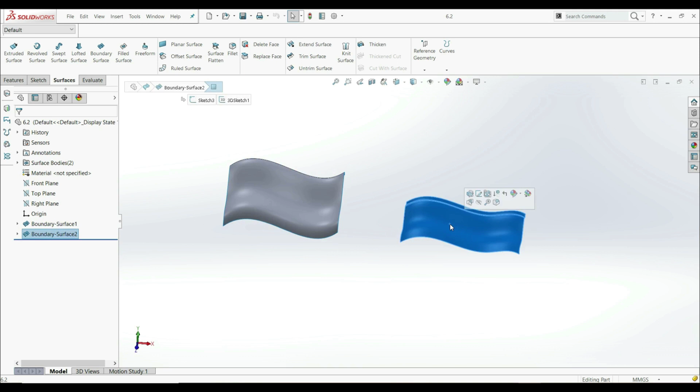In this lecture, we're going to show the second advantage of the boundary surface above lofted surface and swept surface. So we have two surfaces here, this one and this one. And we want to create a new surface that's going to connect this surface with this surface. So we're going to use boundary surface. So let's go to boundary surface. And now we're going to choose our profiles, this edge here and this edge here.

And now as we see, we connected those two surfaces. Here we have connectors, connector 1 and connector 2. We can manipulate connectors as we showed in the previous section for the lofted surface. But let's try to move this connector to this side. Now, if we click on this connector, let's try to move it. As we see, we can position this connector at any point on this edge where we want.

As well, this is the second connector. We can position it where we want. And this is not possible with lofted surface. So this is one advantage, that you can position the connector where you want so you can get better control over your surface. Because in the lofted surface, you could only put a connector from one vertex to the other vertex, but you couldn't position the connector where you want, like this. So this is one advantage.

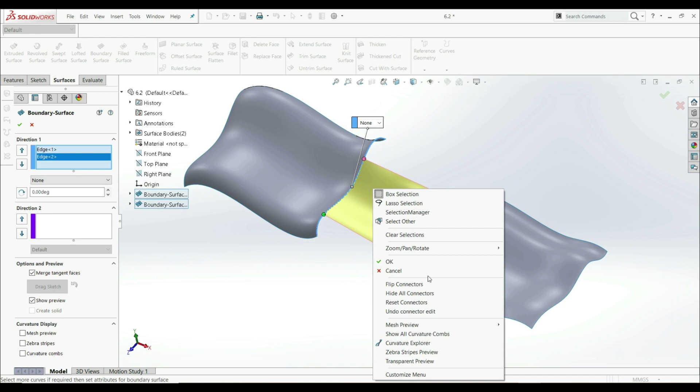But now we want to go back to the surface that we had at the beginning. So I can right click and reset connectors like this. Now let's click OK. So we got this surface here. Now as we see, the transition between this surface and this surface is kind of rough, and between this one and this one. And this is not something that we're looking for.

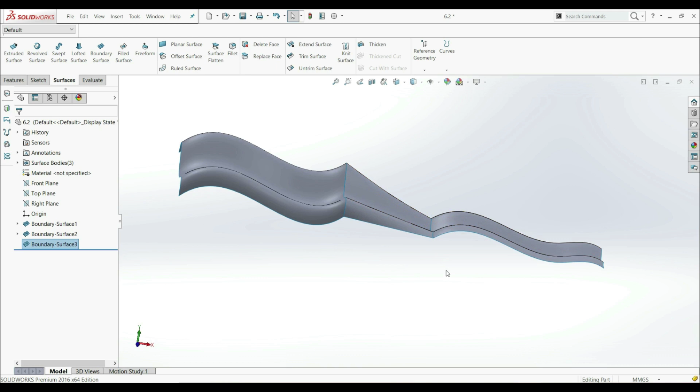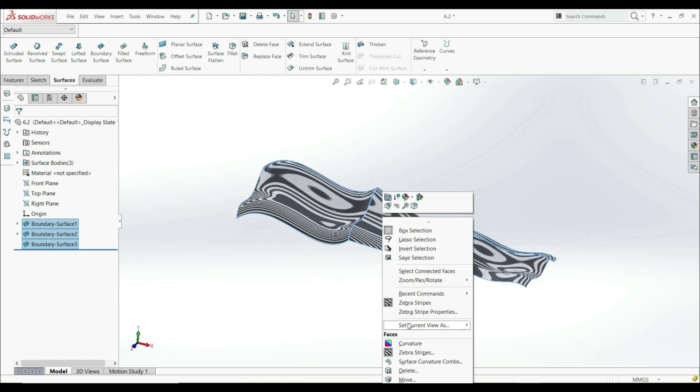If we select this surface, this one and this one, right click, let's go down, and here we have display, zebra stripes, to see how smooth our surface is. And now as we see, it's not really smooth. This is not something that we want. So we want to fix this. Let's first hide the zebra stripes, like this, and now let's go to boundary surface 3, right click, and edit feature.

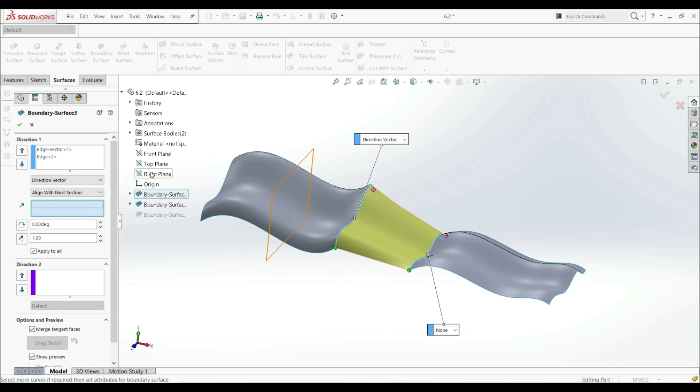Now here we have tangent type. If we click here, we have three options: direction vector, tangency to face, and curvature to face. So we can go with direction vector like this, and now we have to choose a direction vector. Let's choose, for example, front plane like this. And now as you see, we have direction vector here. We worked with this direction vector in the previous section. So here, we can change the draft angle, and we can change tangent length.

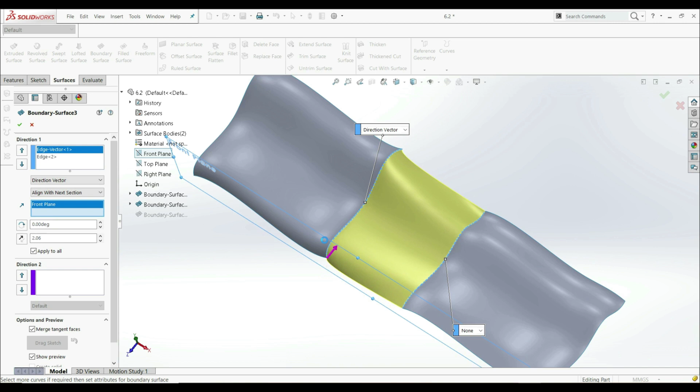As well, we can apply to both sides, or we can work with each side separately. So if we move this tangent length, we can see the difference in the shape. We can also change the draft angle if you want. So this is possible here, but this is only for this edge. If we click on edge 2, this is still none. Now let's go back to edge vector, this one, and let's try another option. Let's go with tangency to face.

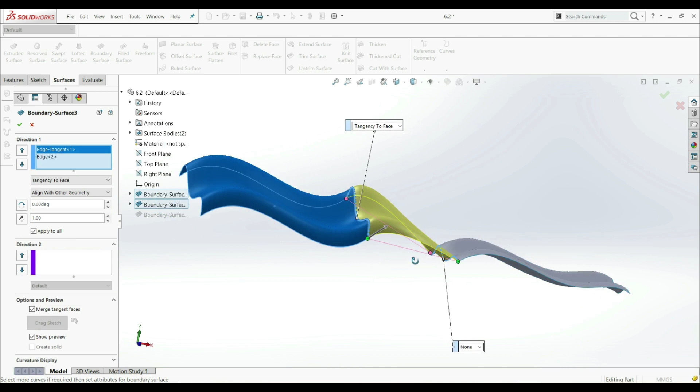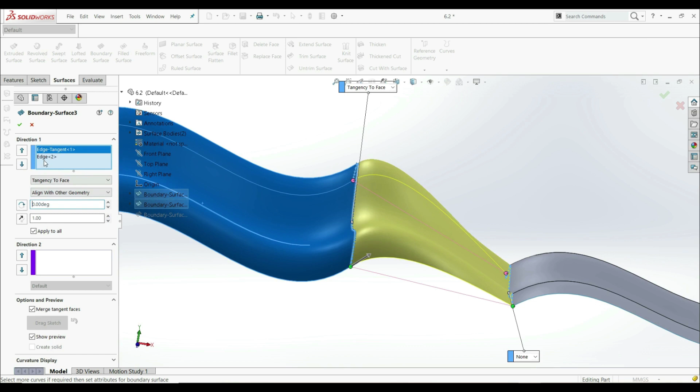Now, as we see, we have here the tangent relation between this face and this face. And now it's more smooth. Here, we can also change the draft angle. Now you can see the changes. And we can change the tangency length, like this. But let's go to 0 and here to 1. Now let's go to edge 2 and let's try to fix this transition here.

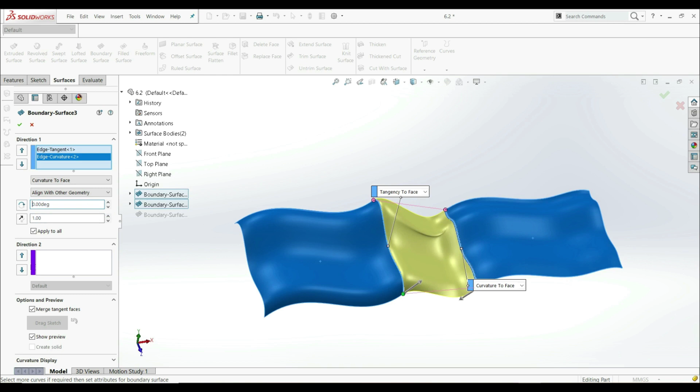Let's try the third option that we have, curvature to face. Like this. Here also we can change the draft angle, like this, and we can change the tangency length, like this. But let's go with 1, and here let's go with 0. Let's click OK, and now let's go with zebra stripes display to see if we got a smoother surface.

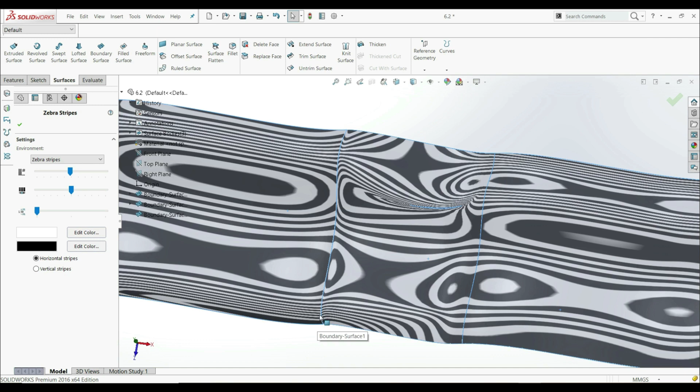So let's select those 3 surfaces, right click, and let's go with zebra stripes. Now if we look, here we have a pretty good surface, it's pretty much smooth, right? Here we used curvature to face, and here we used tangent, and this is not smooth. So maybe we could try to change this to curvature to face to see if we can get better results.

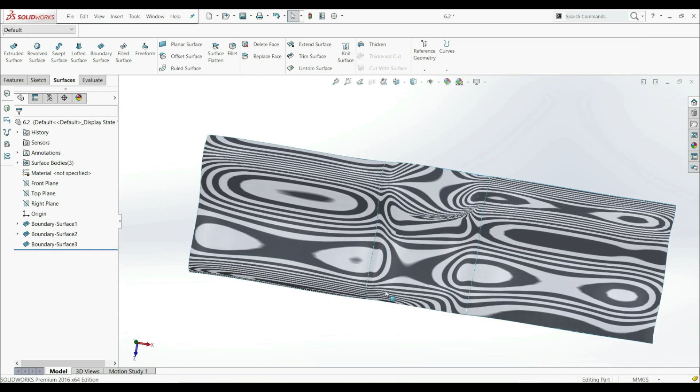So let's go to boundary surface again. Let's choose this edge tangent, and let's go curvature to face, like this. And now let's click OK. And now we see that we got a smoother surface here. And this is much better than the tangency to face in our case. So this is the second advantage of the boundary surface over the lofted surface. You can control the transition between surfaces, and you can get higher quality results.